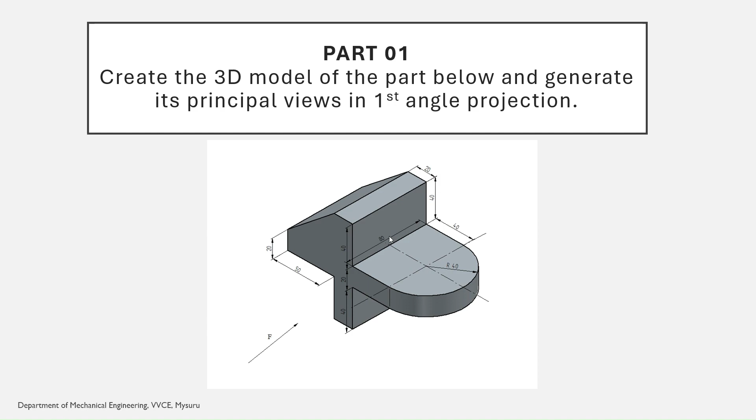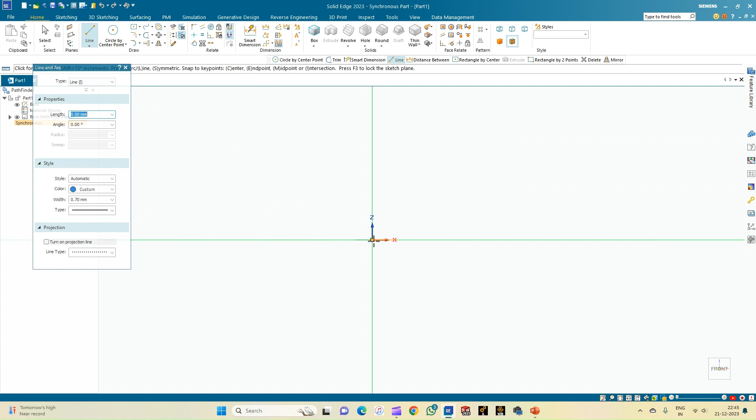Open Solid Edge 2023 and click on New Part. So we shall select the front plane by clicking here. So now you can see that the XZ plane is selected. We shall click on the line option and then move the cursor over the XZ plane so that the plane is locked. And now we shall start creating the part drawing in the sketch mode.

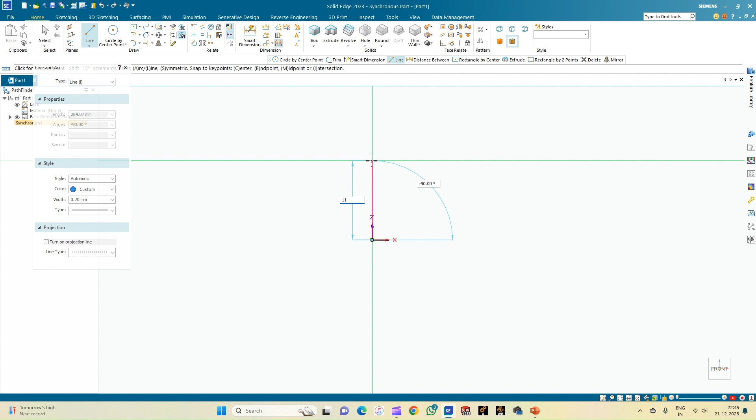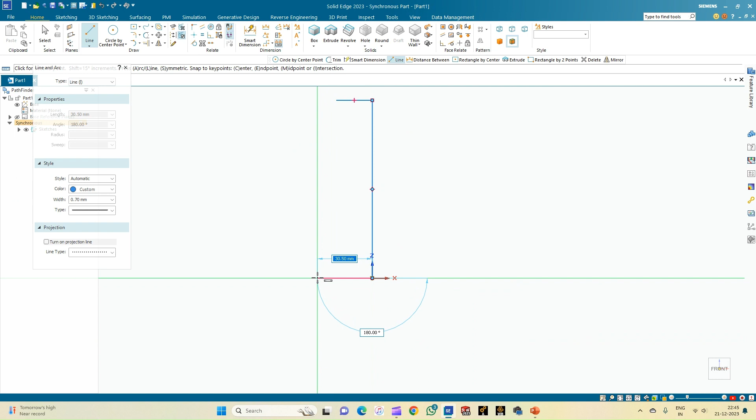So first let me draw a line of 100 mm length, followed by 20 mm. Use the fit option, and from here we shall draw one more line of 20 mm length, followed by 40 mm. From here it is having a web of 50 mm length, followed by a 20 mm line. So now we shall create this inclined part from this point to this point and close the figure.

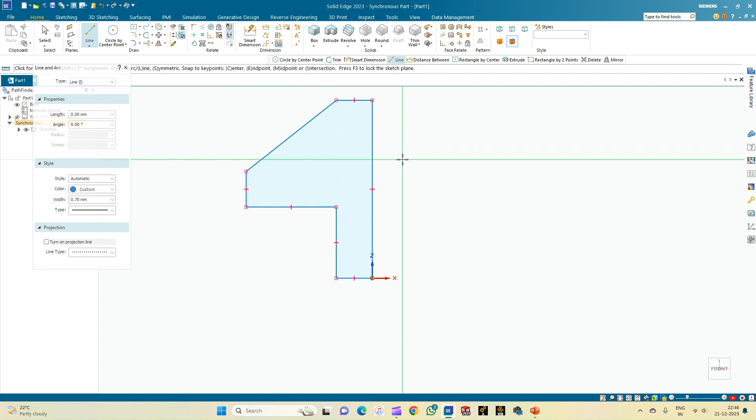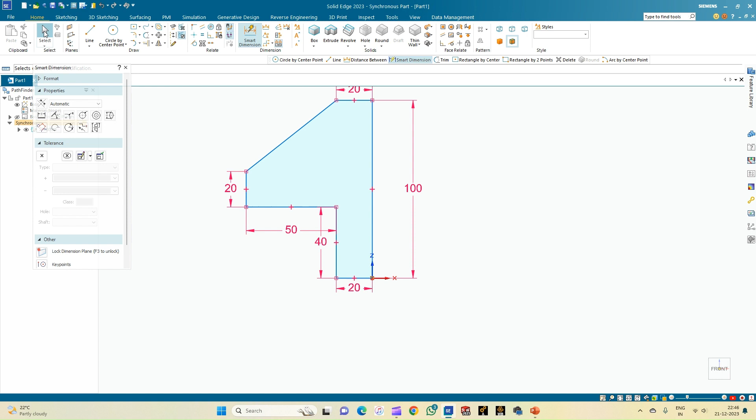So now we shall just go for the smart dimension and recheck the dimensions. So this is 100, 20, 50, 20, 20, and this is 40. So now go for select, select this closed figure and just rotate it by keeping the scroll button of the mouse clicked. Now click on this arrow mark.

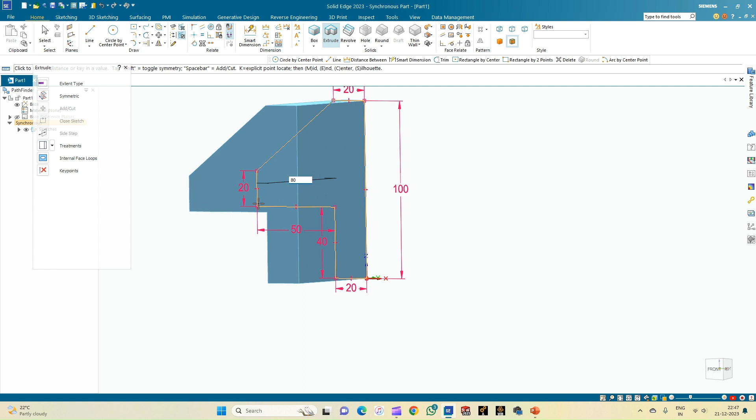So now it is asking in which direction it has to be protruded. We can create the protrusion in any direction, but the overall width of the part as per the drawing is 80 mm. So I'm going to mention the width of the part as 80 mm. So now the protruded part is ready.

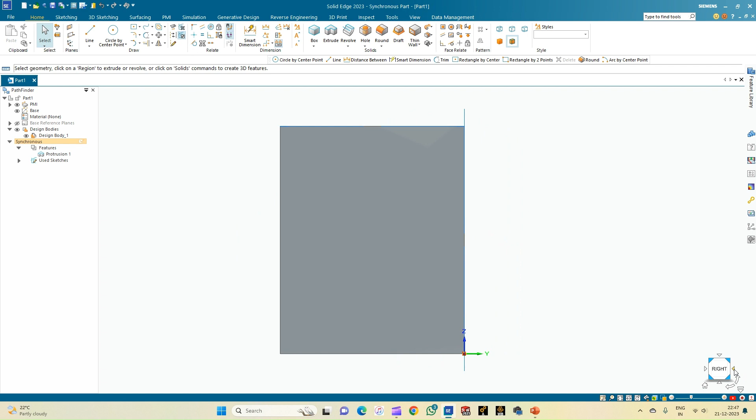So now we can see that this is the front view of the part, but there is one more web which is going to emerge from this particular face. So let me keep this in the front view. If you just move your cursor here, you can see the directions. Clicking here shall give the right side view of the object. So in this plane, let me create the web. As per the diagram, it is at a distance of 40 mm from the topmost corner.

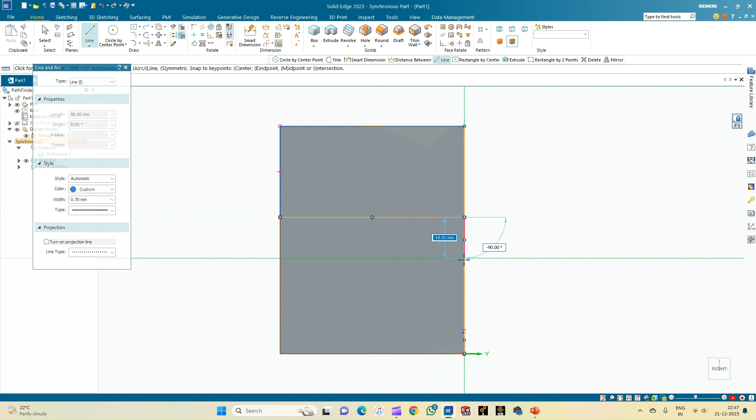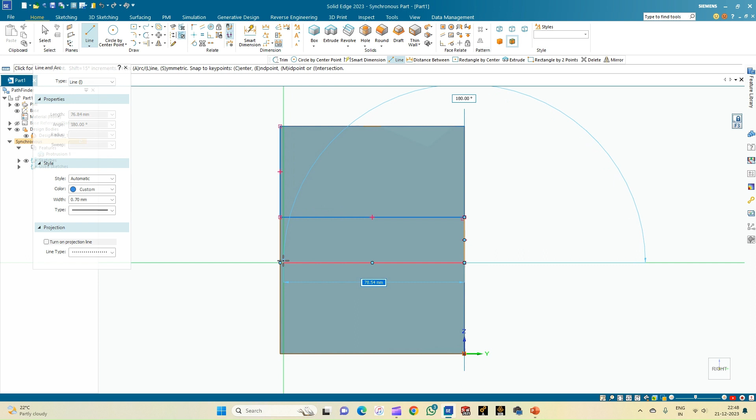So at a distance of 40 mm from the topmost corner, let me draw a rectangle of 80 cross 20, because 20 is the width of the web. So enter 20 as the width, complete the rectangle and complete the model. We will trim this line. This was just for construction purposes.

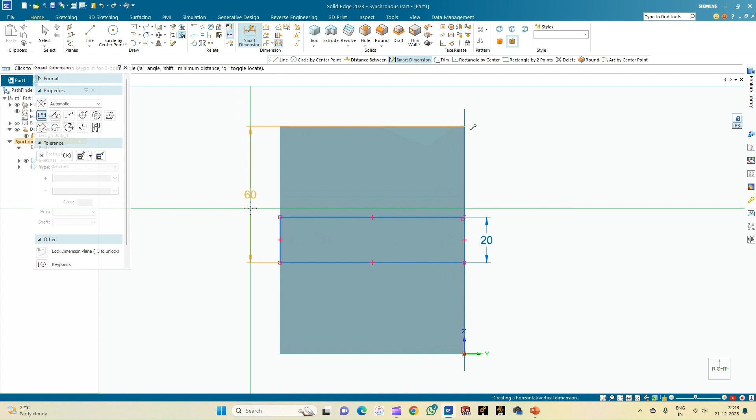So now go to the smart dimension and recheck the dimensions. It is 20, and from this end to this end it is 40. Anyway, 60 minus 20 is 40, so you can verify it that way. So click on select and select this rectangle. Now we are going to protrude this rectangle to a distance of 40 mm as per the sketch. So now we have created the web part.

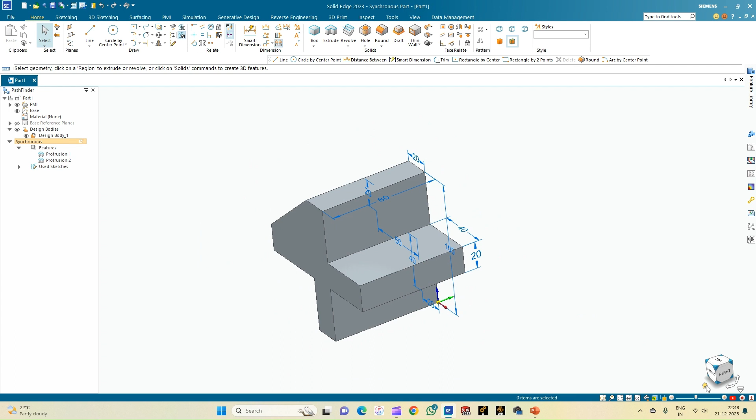So click on this home option so that you get the isometric view of the part. If you click on the front, you get the front view. So now there is one more curvature part that has to be done for the web. So in order to create that curvature, I'll select the top view so that I can create the semicircle here.

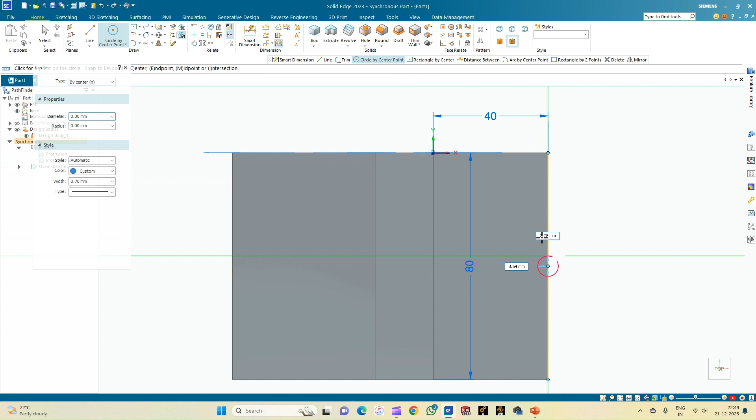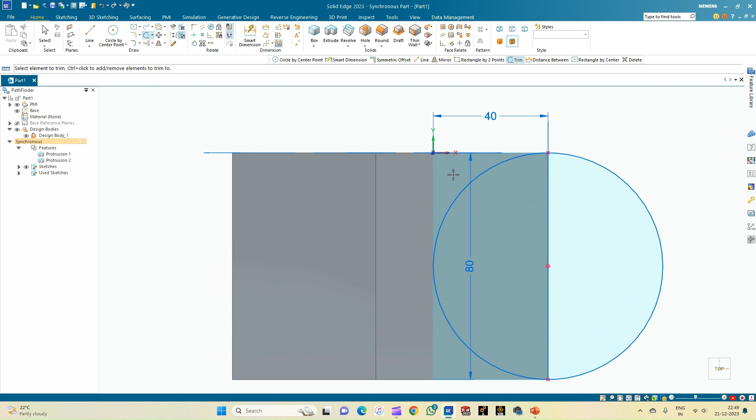So let me click on circle and just move your cursor over the part and locate the midpoint of this particular line of the web, and then try to create a circle of diameter 80 mm. So now go for line option and draw the vertical diameter for the circle of 80 mm diameter. Select the trim option and trim the lower part of the circle so that you get the semicircle. So now we have created the semicircle.

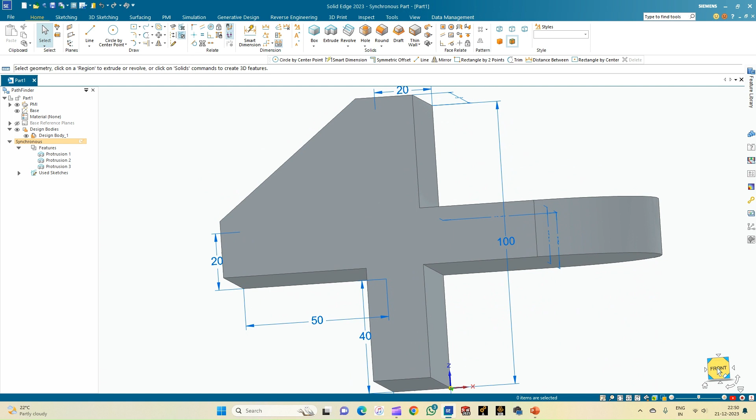Click on select and select the semicircle and protrude this semicircular web to a distance of 20 mm, and this completes the part. So let me keep it in the front view. So you can see this is how the object is going to look in the front view, and this is how the object will look in the top view, and this is the object in the side view, that is the right side view, and this is the object in the left side view. So now we'll keep it in the isometric view. So this is the 3D part which is generated.

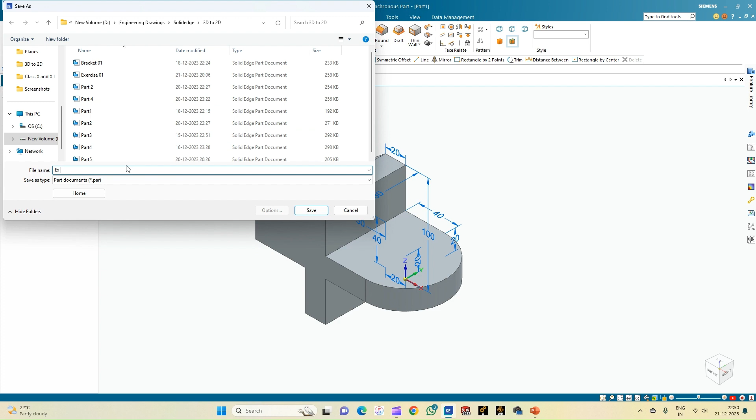So now let us save this file so that we can create a draft of this part. So I'll be saving this as exercise 1. Click on save. So once you have done the part modeling, now let us see how the draft has to be generated. So for that, click on new and select ISO metric draft.

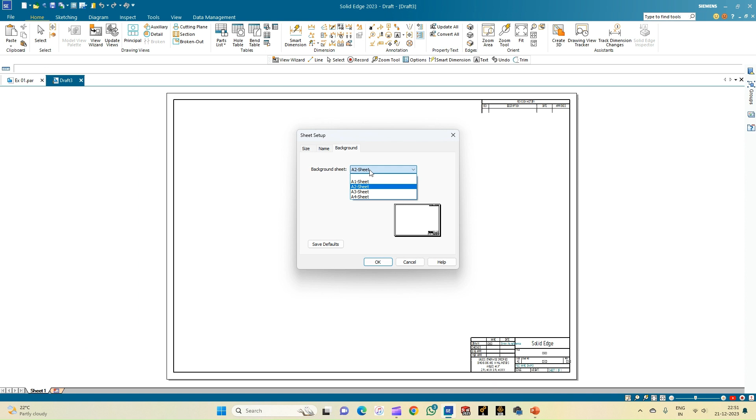Right click on sheet 1, sheet setup, change the sheet size to A4 and tick show background. Click on save defaults, click OK. So click the fit button to fit the sheet to the screen. So the sheet is ready. So now here we have got an option for view wizard in the home menu of the draft window. So I'll click on view wizard and I'm going to select exercise 1, that is the part which I've done recently. So now it is by default taking the first angle projection.

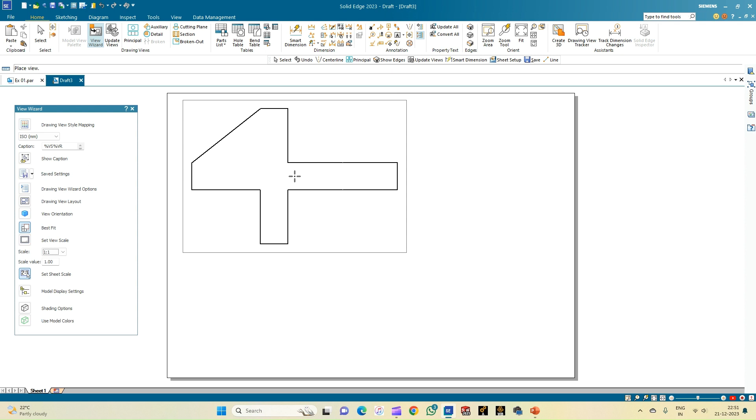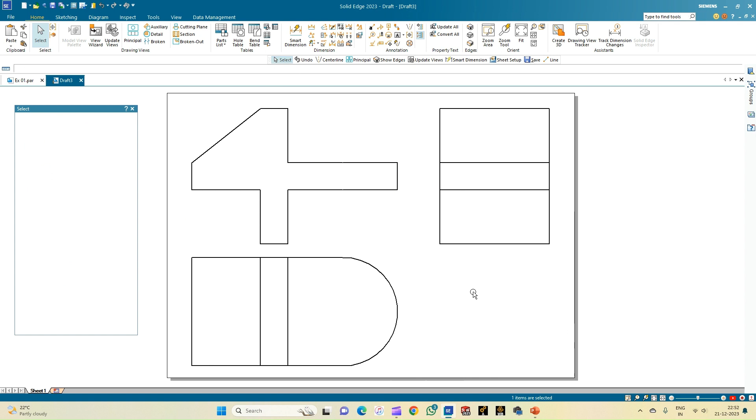So the first view will be the front view. So let me place the front view here, and the corresponding top view will be generated automatically, and then the corresponding side view will be generated. And this is the isometric view. So we can have the isometric view, or even if you are not showing the isometric view, it is not a problem. So just with these three views, you can go for the smart dimension and show the dimensions.

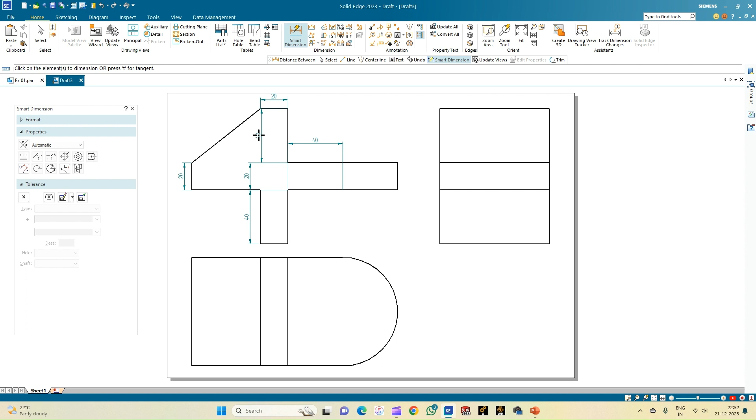So this is 20, this is 20, this is 40, so this is 40 again, and this is also 40. The distance between these two sides of the edges is 20, and this is 50. You can click on this to get the radii of the semicircular web, which is 40 mm, and then the total width of the object can be shown.

This is the total height of the object, which is 100, and then this particular part has been extruded to a width of 80 mm, so you can get the width here. So these are some of the parameters which can be shown in the draft. So now if you want to just name the views, click on text in the annotation, change the font to Times New Roman, and you can just label the views.

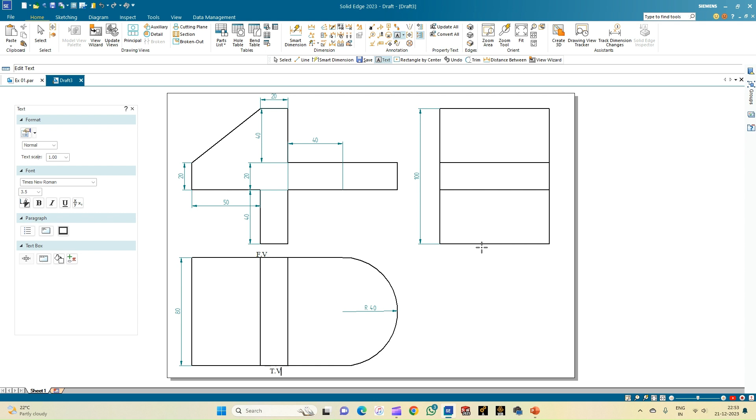So this is the front view, which is labeled as FV. This is the top view, which is labeled as TV, and this is the side view, which is labeled as SV. Or rather, we can just label this as the right side view on the left profile plane. So click on text and label this as RSV, right side view.

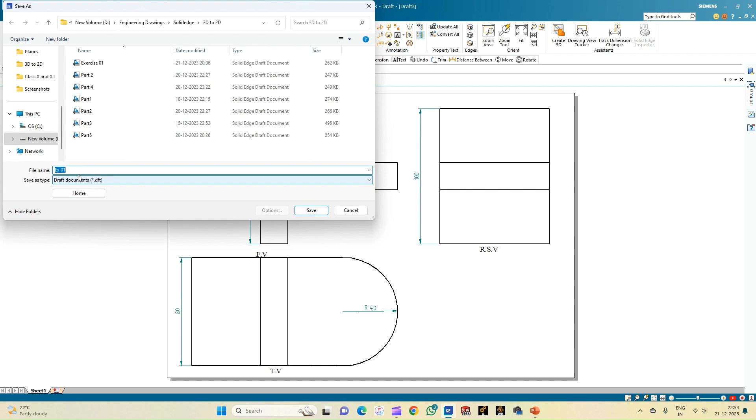So with this, we have completed the views of the part. So click on save, and the draft will also be saved in the .dft format. So this completes the generation of the three principal views of the given 3D part after it has been created in the 3D part mode.